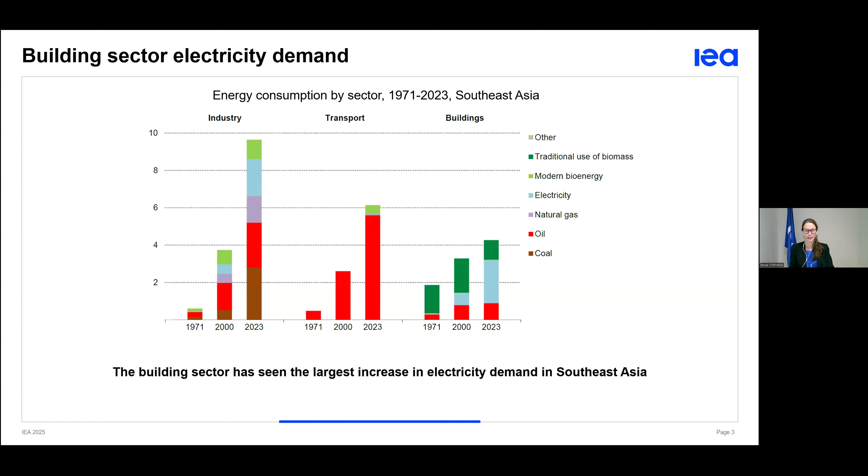So this is just to give a flavour, as we introduce the topic of the building sector in Southeast Asia, to orient ourselves on some of the hot topics. One of the important issues we see in Southeast Asia is the increased penetration rate of air conditioners in households. Appliances and space cooling actually account for more than 30% of the energy consumed in buildings, and their share is set to increase rapidly.

And this trend is actually projected to grow ninefold in the region, from 30 million units in 2020 to 275 million units in 2040. And we do see differing rates of air conditioning ownership in Southeast Asia.

Really being able to collect information on and to clearly understand and quantify energy demand and energy efficiency is critical for us when we're supporting building sector policy. So I wanted to include these introductory pieces of information to set the scene as to why we might be interested in energy demand information for Southeast Asia and how it might inspire and inform our policy making.

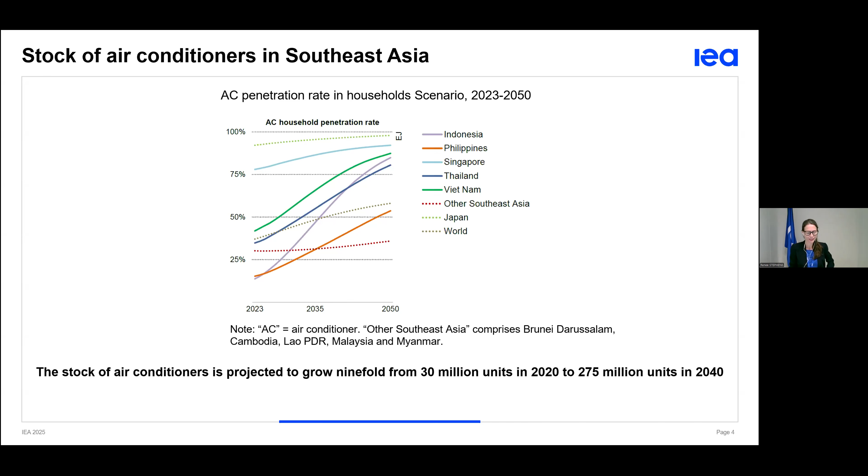So into a definition: what is demand-side data? I'll go through this briefly because some have seen this before, but today we're focusing on what demand-side data represents for the residential and services subsectors in the economy in Southeast Asia.

So demand-side data represents the energy consumption and the activity data for the end-use sectors, and we often see it grouped into end-use sectors according to buildings, industry and transport. Typically energy consumption is given on a per annum basis, and some common units that we'll find in the building sector will be kilowatt hours. We might be talking in terms of joules, potentially when we're talking about gas usage, for example. And activity data is going to vary by category, and it covers a wide range of activities.

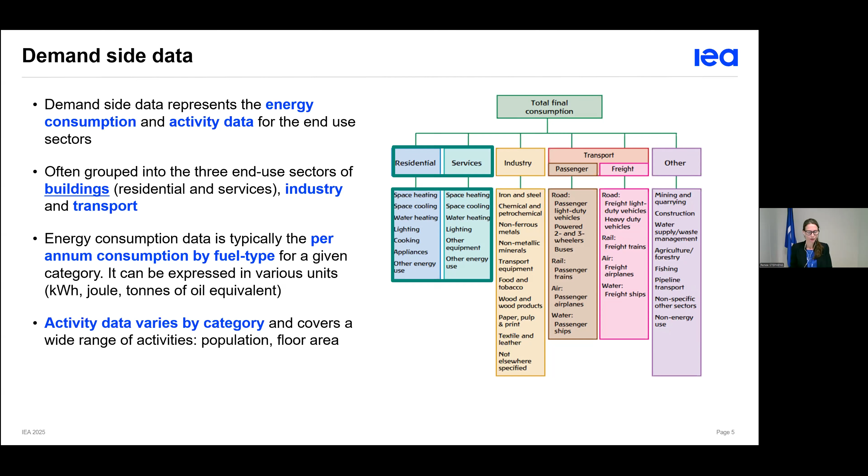So for the building sector, when we're talking about activity data, we might be looking at what is the population that is being served, or what is the floor area that we see happening in terms of the energy consumption. So really, this is where we begin with the definition of demand side data.

And so what are energy efficiency indicators? So the energy efficiency indicator is a ratio representing the energy consumption per unit of activity of the given category. So these are signs that describe observable changes, and they really are the building blocks, the evidence that we use for looking at policy and what we might be doing around energy efficiency and how to improve energy efficiency.

The most generic or general form of an energy efficiency indicator you might hear about and we use is energy intensity. And once we've got an energy efficiency indicator that's in place and we've identified that and we're collecting data on that consistent basis, then we can be using that data to track and compare information and progress over time.

And so in the right-hand side there, this is just a visual diagram that shows that you can have different levels or different hierarchies of looking at energy efficiency and what those indicators might be. So on the bottom, that's a more fine-tuned, oftentimes more accurate picture of specific energy efficiency performance that might be happening, for the building sector, for example, at an appliance level. So what is the energy efficiency of individual types of appliances?

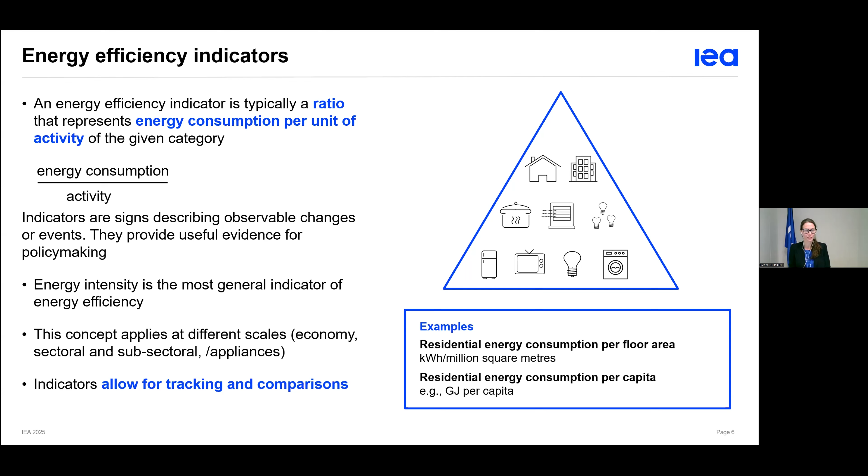And so there's some examples there on the right-hand side of how we might define residential, for example, energy consumption. We might look at that on a per floor area basis and using units like kilowatt hours per million square meters, not kilometers. That would be pretty aggregated, wouldn't it?

And then, so how is all this relevant for supporting our policymaking, or if we're a person who's enabling policymaking, how is this data gathering useful? So demand side data and energy efficiency indicators are really about quantifying energy consumption and energy efficiency. So for the policy development side, this data can be used to identify the current situation, trends, and to highlight problems that need solving or the opportunities for improvement. And they can be used for establishing a baseline of performance and to set targets and objectives. So it's a really important starting place.

And again, this applies at different levels of policy making. The very highest level, whether we might be talking about national plans and roadmaps, right down to the detail of what we're going to do about improving the energy efficiency of an appliance in a residential sector, for example, or a commercial. And then monitoring data is, of course, incredibly useful and important for monitoring.

Demand-side data on its own is very useful for understanding the current situation, trends, and for projecting what might be happening with energy consumption in our countries or regions. And of course, it's a basis for evaluating progress and success of policies that have been implemented. And then also for refining what we might do in the future and recalibrating targets and really assessing how to make further headway.

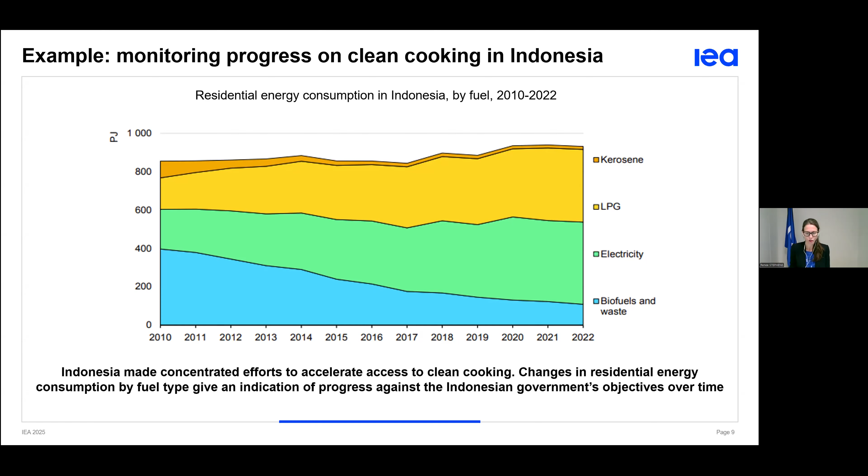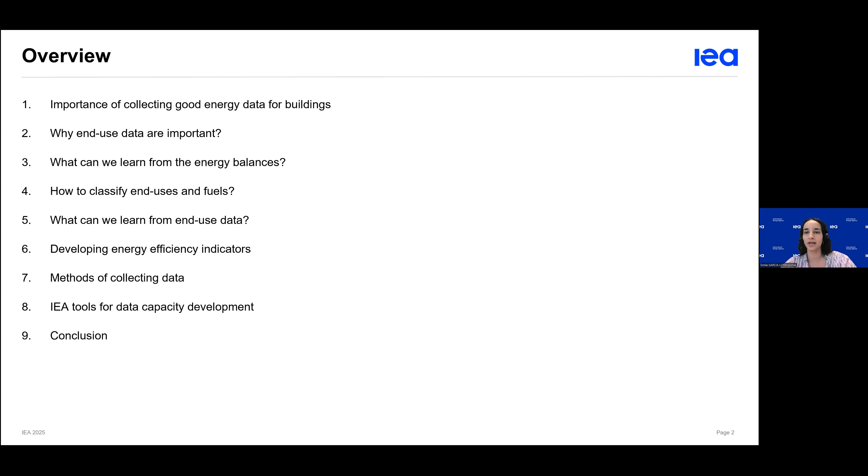Let's start with why the building sector is important. Buildings and appliances determine and shape our quality of life. The building sector is central to people's daily lives, from the heating, hot water, and cooking in our homes, to the lighting at home and work, and the everyday use of appliances like refrigerators, washing machines, televisions, laptops, etc. As demand for cooling and appliances rises, ensuring energy efficient, low emissions buildings is key to improving quality of life, reducing energy poverty, and also achieving climate goals.

When we disaggregate Southeast Asia energy consumption by sector, we can clearly see how energy use has evolved from the 70s to our days. The industry sector remains the largest consumer, accounting for around half of total end-use energy demand.

It consumes nearly 10 exajoules per year, with growth driven by increased production of iron, steel, chemicals, and light manufacturing. Then the transport sector has driven the region's oil demand, reaching around 6 exajoules in 2023.

But the building sector, while more modest in total energy consumption, still plays a critical and growing role. Today, more than 95% of households in the region have access to electricity, and around three-quarters use clean cooking options such as LPG and improved cook stoves. Energy use in the building sectors has been shaped by rising incomes, urbanization, and significant improvements in energy access across Southeast Asia.

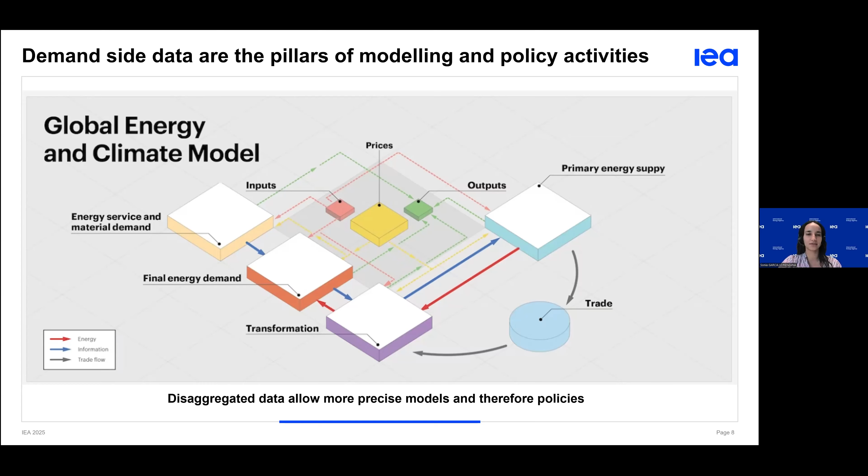And end-use data are the basis to develop efficiency indicators. Generally, energy efficiency indicators are intensities presented as a ratio between the energy consumption measured in energy units and activity data measured in physical units. For example, we can compute indicators such as space heating per floor area, lighting energy consumption per dwelling, or total services energy consumption per value added, which give us important information.

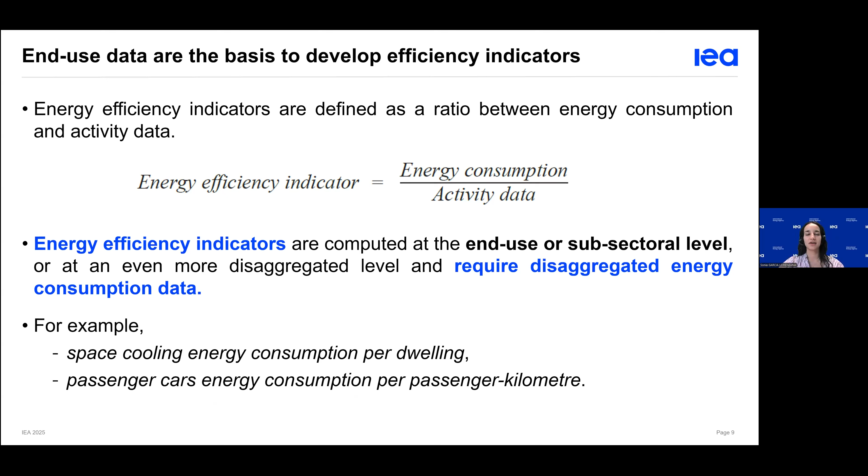These indicators provide valuable insights into energy efficiency, consumption patterns, and sector-specific trends, and their selection depends on the specific type of information we aim to extract, whether it relates to household energy use, service sector efficiency, energy intensity, etc.

Thanks to all this new detailed data, one can, for instance, decompose the consumption trend into three drivers, namely activity, structure, and efficiency. For instance, here for Portugal, we can see that efficiency gains have compensated for increased structure overall, leading to a more or less stable consumption in energy. This is key to track the impact of past policies, for instance.

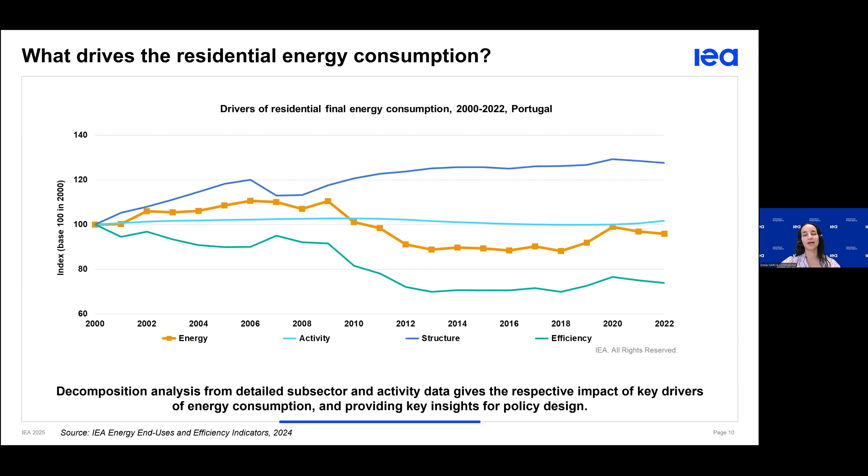One can also learn from efficiency indicators where and how savings are happening, the effectiveness of policies, potential for future improvement, and the importance of continued investment.

Here are the results from this decomposition analysis shown for the whole Portuguese economy over the past two decades. Total final energy consumption in Portugal in 2022 was just above 600 petajoules, with savings equal to 125 petajoules, which is almost 20% of its 2022 energy consumption. It highlights how much energy has been saved only thanks to efficiency improvements.

And here, these gains for Portugal mainly come from residential and also later on industry and services. This clearly shows how targeted improvements in household appliances, building design, and heating systems can deliver long-term benefits.

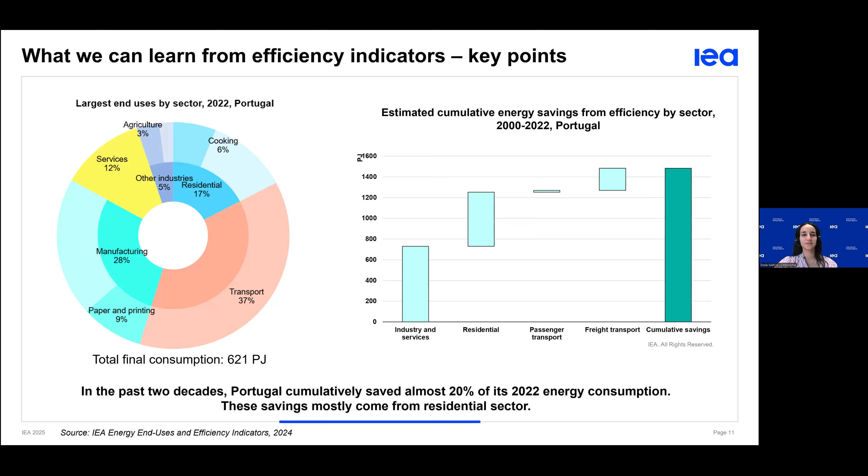But going a step back from end-use data, what can we learn from the energy balances? As you know, a country's overall energy situation data can be presented as an energy balance, which is basically a matrix that displays flows and products and is divided into three sections: supply, transformation, and final consumption.

In the columns, we have the energy products, and in the rows, we have the different flows. In an energy balance, you can compare products since they are all reported in the same unit. So this format allows easy comparison of the contribution each fuel makes to the economy, and also the interrelationships through the conversion of one fuel into another.

Here, we will only focus on the demand side data, which is the second and third floor of the matrix. The third floor represents the total final consumption, where particularly buildings consumption is allocated into the two rows highlighted in blue, which are residential and commercial and public services.

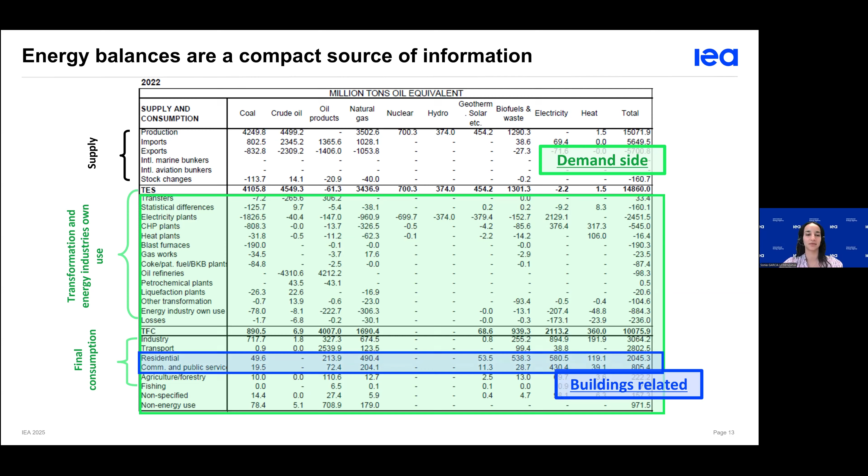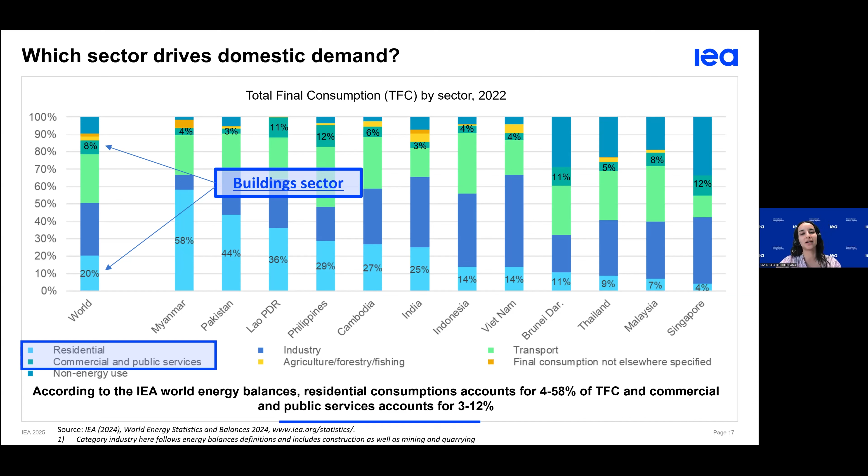And also, we have a category that collects other energy use, which typically refers to energy that cannot be attributed to specific appliances or end uses due to insufficient disaggregation.

Now, the services sector is divided by building energy use, composed by end uses like the residential sector, but here we only take into account space heating, space cooling, lighting, and other energy use, and the non-building energy use, which takes into account energy consumption in the services sector that is not building related, such as street lighting.

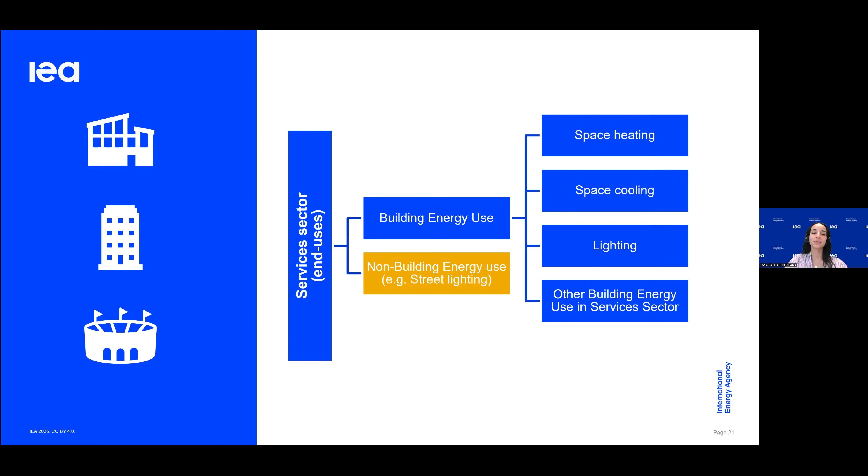But also, the services sector can be divided by subsectors, ranging from sewage and waste collection, wholesale and retail, accommodation and food services, to public administration, education, arts, or other services activities. These codes are divided by the ISIC codes.

In addition, energy use can be collected as total energy consumption, of which data centers is a segment that has grown rapidly in the last few years. Then each of these end uses and subsectors can be further broken down by energy products such as oil, gas, coal, biofuels, heat, and electricity for both residential and services. The real challenge here, however, lies in obtaining disaggregated data, which is not always available or consistently reported.

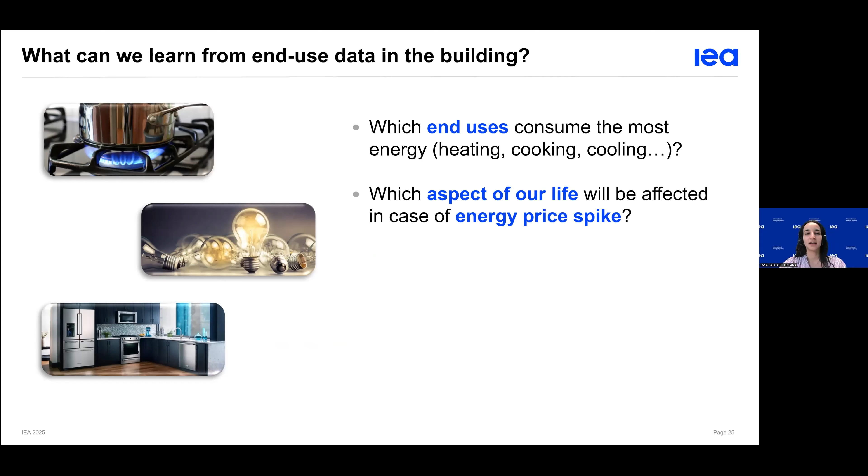And after doing all this aggregation, what can we learn from this end use data? With building end use data, we can answer questions such as which end uses consume the most energy: heating, cooking, cooling, appliances; which aspect of our life will be affected in case of an energy price spike; what is the share of LPG and electricity used for cooking; are we using energy for space heating more efficiently over time; or which end uses are efficient and which ones need help to improve?

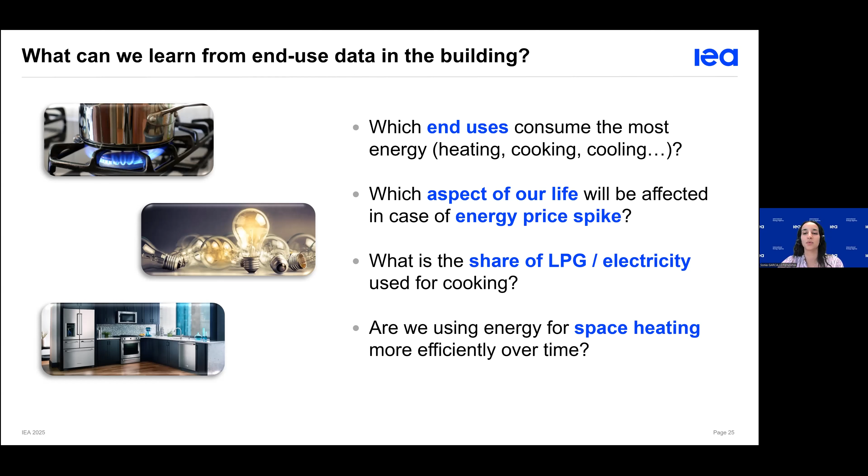When we look at overall results in IEA countries, we see that space heating accounted for over half of the residential energy consumption, with the highest shares in European countries and the lowest in Asia and Oceania. Appliances accounted for nearly 20% of total residential energy consumption, with refrigerator-freezer combinations making up around 28% of that share, followed by clothes dryers and televisions, each contributing approximately 19%.

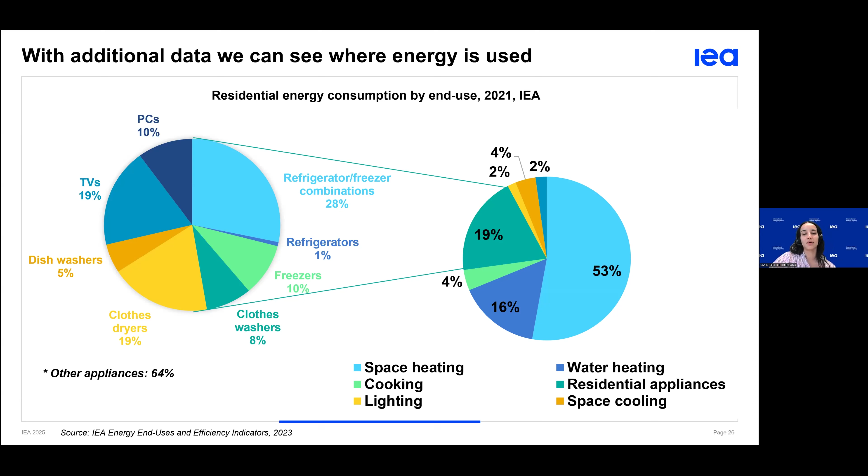We can then analyze country-specific energy consumption to better understand the key end uses in each case. For example, here in the US, we can see it's also relying mostly, like half of it, on space heating, but then also followed by a huge percentage on appliances, water heating, and space cooling.

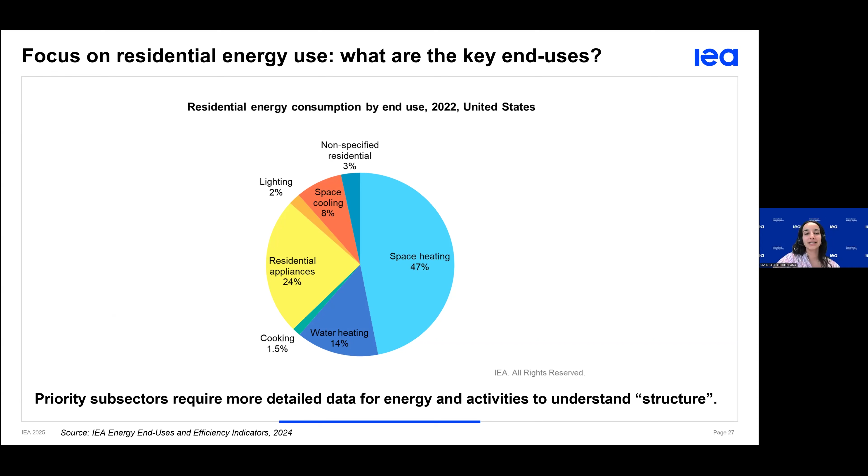This approach also allows us to compare between countries and gives crucial insights into our standard of living. One can see the influence of climate or different lifestyles, such as habits of eating out, cooking methods, and types of stoves. For instance, here we can clearly see a difference between Finland and Morocco's consumption. While the majority of energy consumption in Finland goes to space heating due to its cold climate, only a small proportion is used for heating in Morocco, where most energy is instead consumed for cooking.

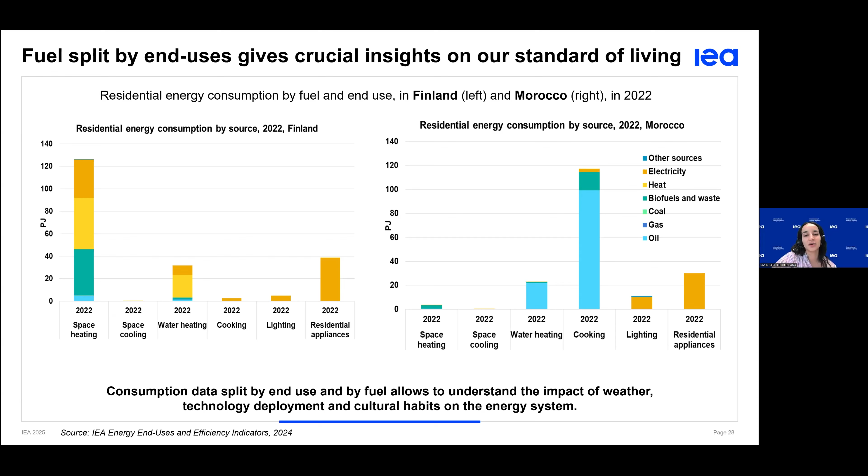Finally, when we talk about cooking consumption within the residential sector, it is important to differentiate between clean cooking and not clean cooking, which is a topic covered under the climate and sustainable development goals. More particularly, SDG 7, which mentions ensuring universal access to affordable, reliable, and modern energy services.

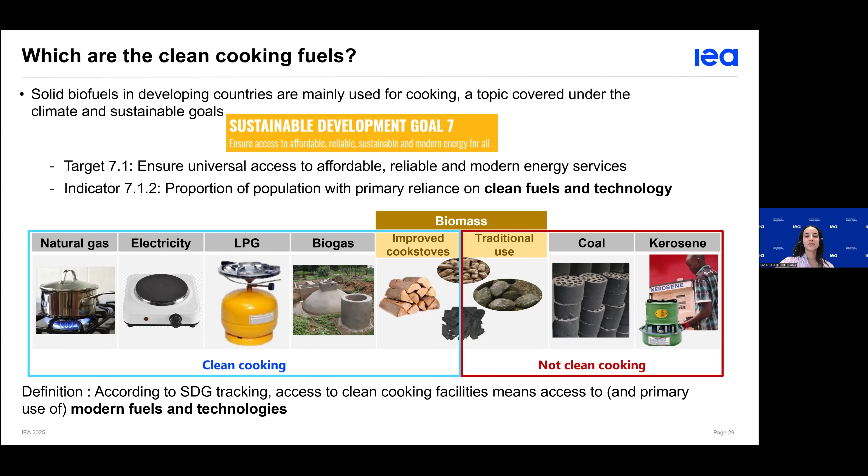How do we define clean cooking facilities? We have several technologies for cooking, and at the IEA we define as not clean cooking technologies the use of biomass, coal, and kerosene. For biomass, only traditional use is not clean; if you use an improved stove, it counts as clean cooking. With this, we can calculate access to clean cooking, and all of this justifies the importance of data for the residential sector.

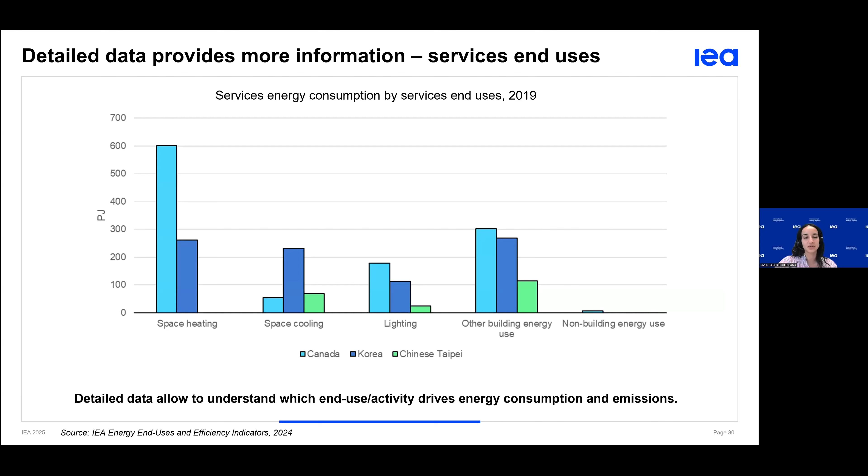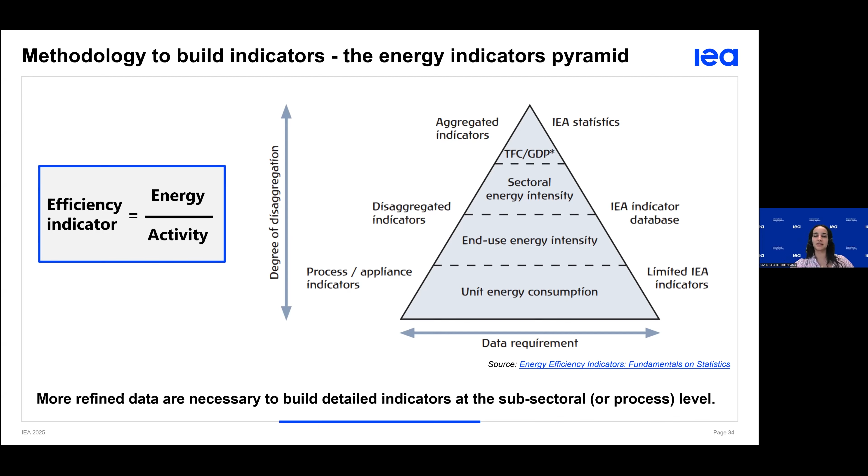The further down one goes, the more data one needs. For example, end-use energy intensity indicators could be space heating energy consumption per floor area, and unit energy consumption indicators can be energy consumption per appliance unit, or per unit of refrigerators, TVs, PCs, etc.

So recall that there are two types of data needed. First, energy data by end use and by fuel, as we just mentioned. Note that heating and cooling need to be temperature corrected to take into account weather effects. We'll see this later on.

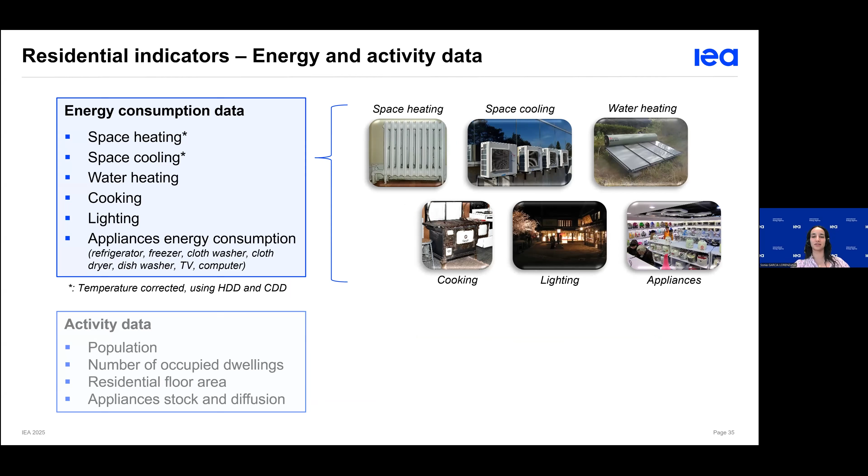But also, activity data is important. In the residential sector, important activity data could be population, number of occupied dwellings, residential floor area, and appliance stock. And importantly, we need to harmonize the methodology.

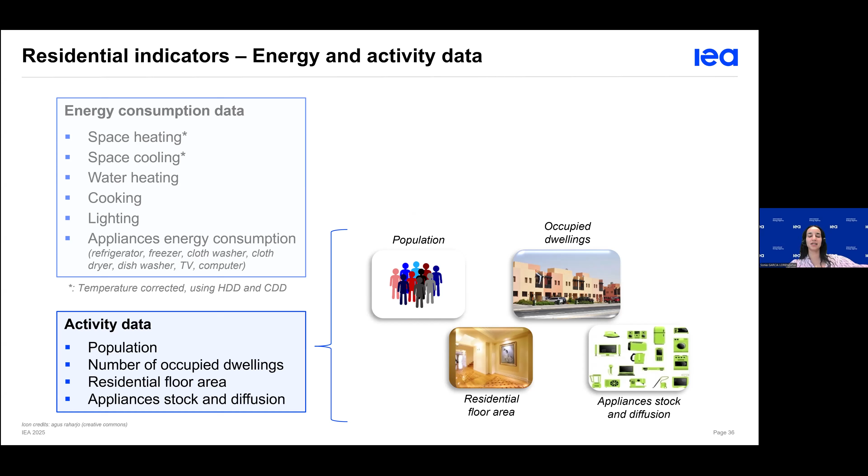Following the same set of rules for energy and activity data is essential to build robust and comparable datasets. For instance, vacant dwellings should not be included alongside occupied dwellings in the energy consumption statistics for the residential sector. This ensures comparability across countries and consistency with population and housing data.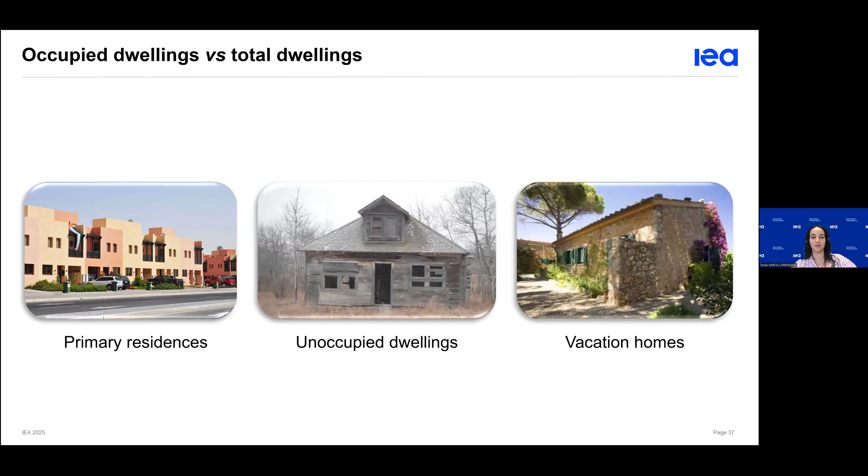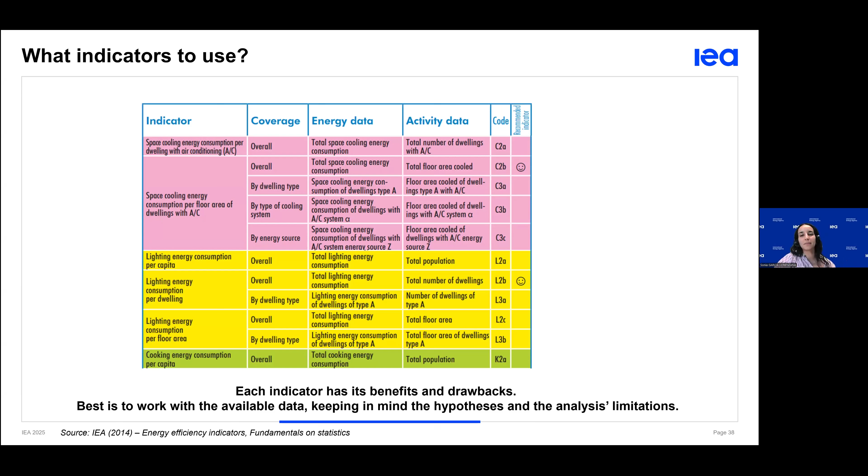With accurate activity data, we compute the indicators. Each indicator has its benefits and drawbacks, and it's important to select the indicator that best suits the information we aim to extract with the available data we have. Efficiency indicators can then help us understand the trends and key drivers of energy consumption.

First, we need some context: the population has increased, so normally more people means more energy use. But surprisingly, energy use per person, or per capita, actually decreased by about 10%, meaning people are using less energy individually than before. At the same time, household occupancy went down, with fewer people per home.

That usually leads to more total homes, which could increase energy use. But again, when we look at energy use per dwelling, we see a decrease of about 15%, even more than the per capita drop, meaning homes are becoming more efficient. Finally, considering only space heating consumption, we see that energy per floor area benefited from even higher efficiency gains over the period, around 25%.

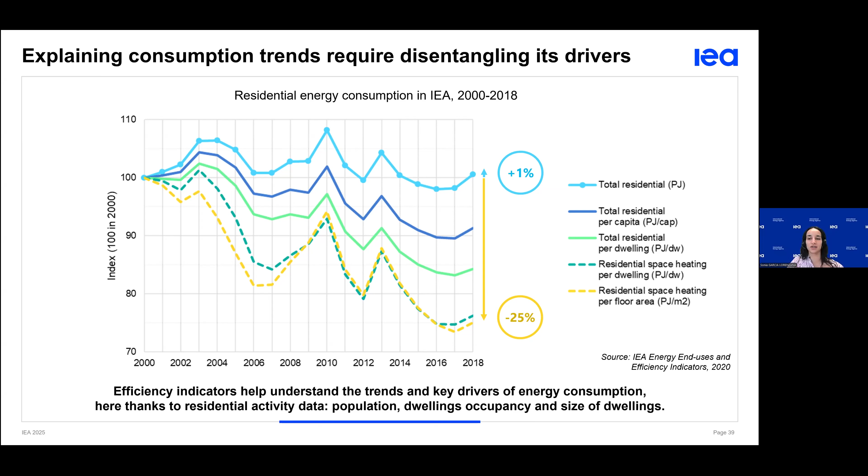So this is a strong sign that efficiency has improved. By isolating these effects and factors, we see that efficiency gains are the key driver behind the stable energy trend. This is the approach for the decomposition analysis.

If we go to Menti, now I would like to ask you: what should be included in the coverage of energy consumption of the residential sector? You can choose between occupied dwellings, occupied plus unoccupied, occupied plus vacation homes, or all three of them.

The correct answer is occupied dwellings, because, as I mentioned before, we don't take into account unoccupied dwellings and vacation homes, to avoid double counting and to make sure we can compare across countries with current population data.

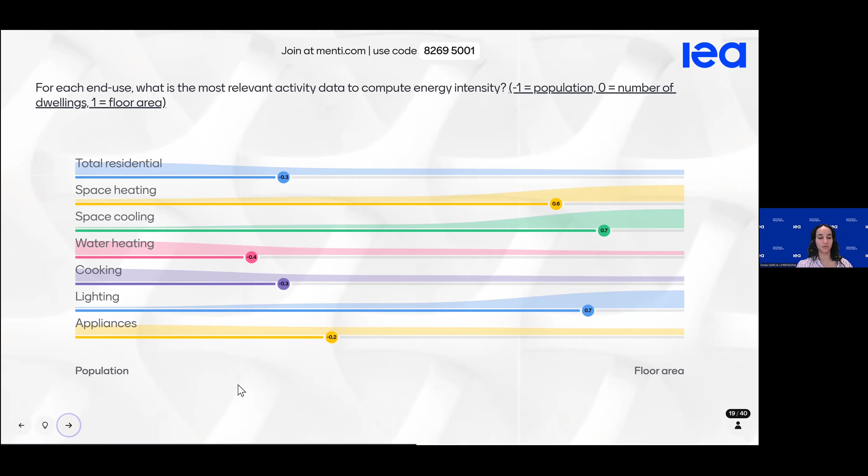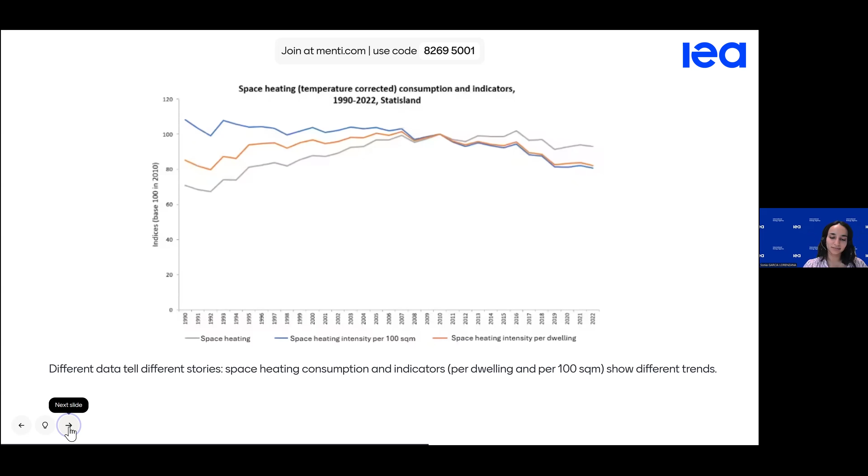Before 2010, we see that space heating consumption is increasing, and increasing faster than the intensity per dwelling, while the intensity per 100 square meters is roughly stable. So how do you understand these trends? Choose the possible ending for the following sentence: space heating energy consumption increased because...

So basically here we are only focused from the beginning of the graph until 2010, and we are trying to look at what was the reason that space heating consumption increased.

Okay, so here we need to look at the indicators and the data that we are looking at. For example, population—most of you have chosen population, but we don't have any information about the population. Here, we cannot tell. Maybe it's true, maybe it's not. So the third option is not correct.

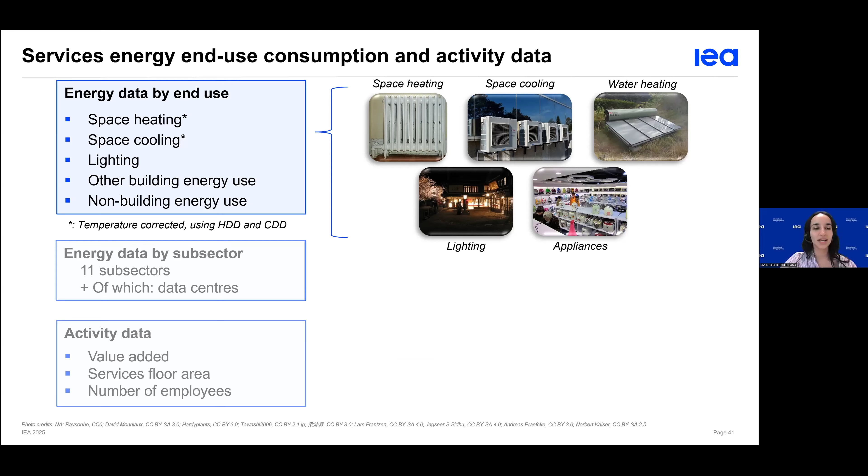Coming back to the slides, I wanted to introduce a bit what we can do with energy efficiency indicators for the residential sector. But then taking into account services, we have the energy data by end use, as for residential, but then we also have energy data by subsector. And also we are now taking data divided by, coming from data centers. The activity data can also be a number of employees, services floor area, and value added.

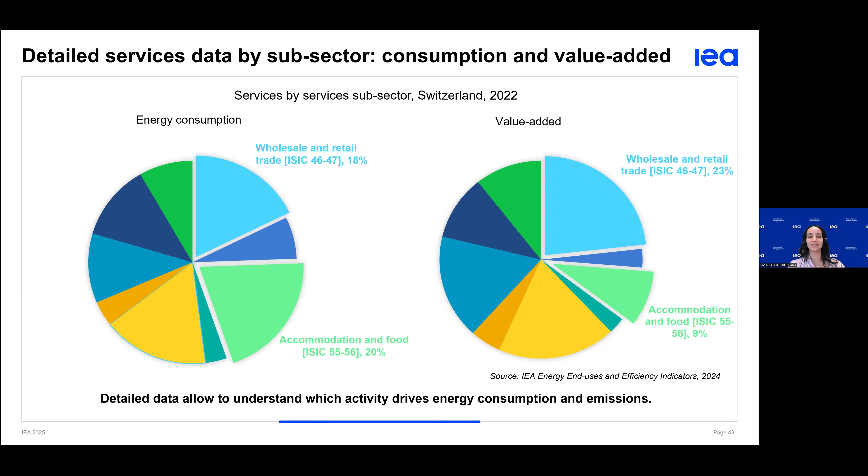The energy efficiency indicators show that wholesale and retail have a significantly lower intensity than accommodation and food services.

Again, if we come back to the Menti, let's try to ask a question similar to the one we did before for residential. For each end use, what is the most relevant activity data to compute energy intensity? Now, instead of number of dwellings, we can choose between population, value added, and floor area.

Yes, here it is similar to residential, but now we are taking into account that we also have subsectors, which usually goes with value added—it always goes with value added. So we have the two last subsectors, wholesale and retail, and accommodation and food, which go with value added. Then total services, which is the most aggregated data we can have for the consumption for services, so it would go with population. And finally, space heating, space cooling, and lighting, which will go with floor area.

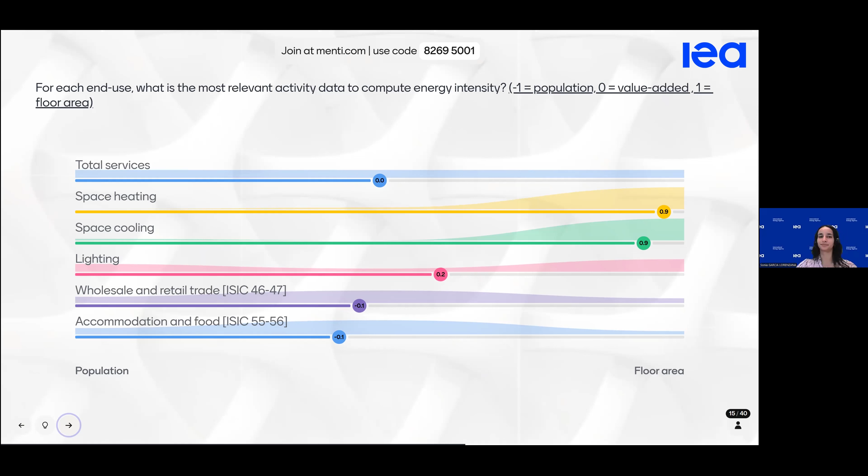So yes, here we have the four different methods, but usually in the building sector, in the residential sector, we rely mostly on surveys. Surveys are costly but very effective and constitute a key method for the building sector. One of the most time-consuming tasks is carefully designing the survey or determining whether a suitable design already exists and identifying a representative sample. Here are the most important parameters to design in case we need to implement a survey:

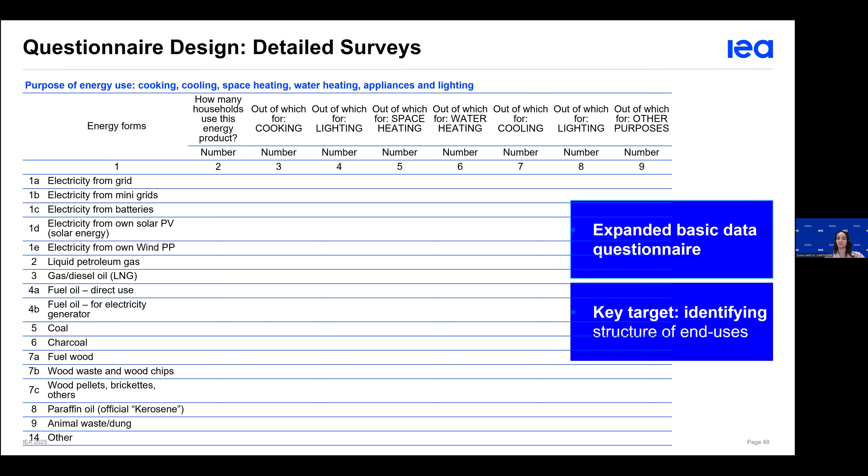After finalizing the survey design and collecting the results, the final step is model implementation. This includes integrating various data sources, the administrative, the macroeconomic, household, and business survey data. These inputs are used to model energy consumption across end uses such as space heating, water heating, and so on.

And the output is the total final energy consumption disaggregated by types of fuel, such as coal, fuel oil, natural gas, etc. Once the data processing models are in place, an annual model is established to calibrate data between survey years and probably fill the missing data.

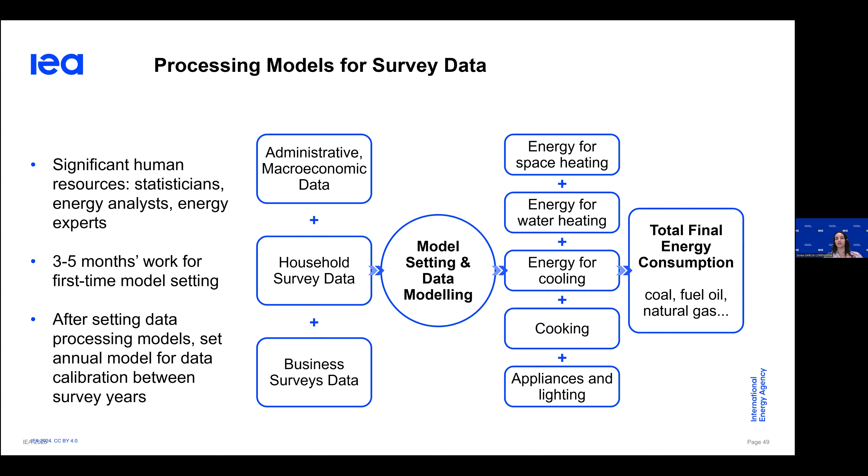So yes, coming back again to Menti. We want to ask you some three questions about your experience and your current data. So do you have a national survey on household energy consumption disaggregated by end use? Okay. Do you have available activity data in your country for the building sector? And select all the activity data that apply.

We cannot. So, it doesn't work, Sonia? It doesn't work? Yes. The choices cannot be pushed. No? Okay. But are you seeing the question in your computer or in your phone? Yeah. The phone. But even though we are pressing it, it doesn't work. Okay. No worries. We'll go to the next one.

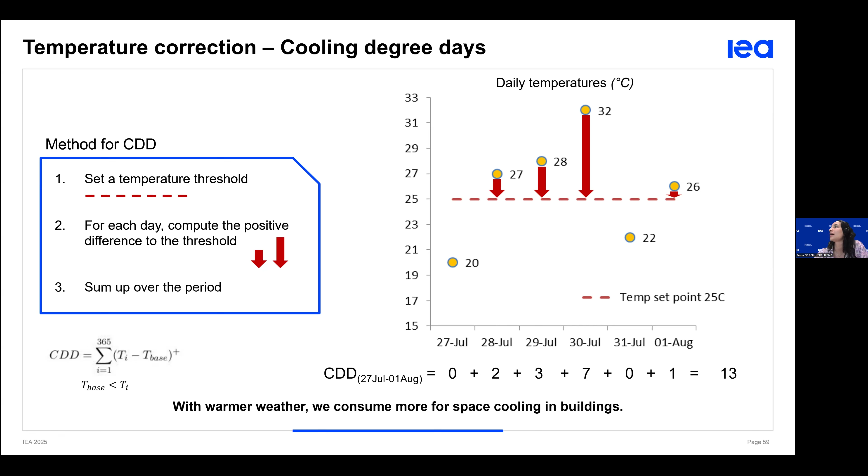And then when we have this information, we calculate the adjusted energy consumption as the actual energy consumption times the average CDD divided by the CDD of the current year. So for example, here we have 2017 to 2019. As before, we calculate the CDDs for each year with the method I just mentioned, and then we calculate the average of the 3 years for CDD. So in the numerator we have that average, and in the denominator the CDD for each year, and then the actual energy consumption.

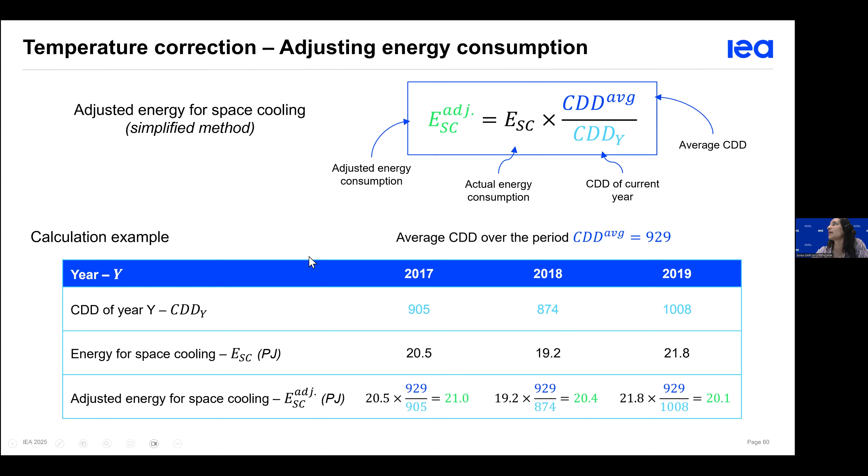So to compute the adjusted energy consumption, we just calculate this formula, and we get, for instance, for 2017, 21. For 2018, 20.4, and then 20.1. So this is an interesting thing to do, because as we can see, the space cooling in gray, which is the space cooling energy consumption without temperature correction, in 2017 is higher than in 2018, and then it goes up again. But with the temperature corrected, it decreases over time. So temperature correction allows us to identify trends more clearly, removing the weather impact on consumption.

And so I have two more questions on Menti, but I don't know if we have time, Agnieszka. Yes, okay, so we don't have time, but basically I just want to finalize by saying that it's good to correct for weather, because then, for instance, we can see that the space cooling with the temperature corrected is actually higher in 2017, whereas here we could think that in 2019 the space cooling would be higher in the last year. And yes, thank you so much.

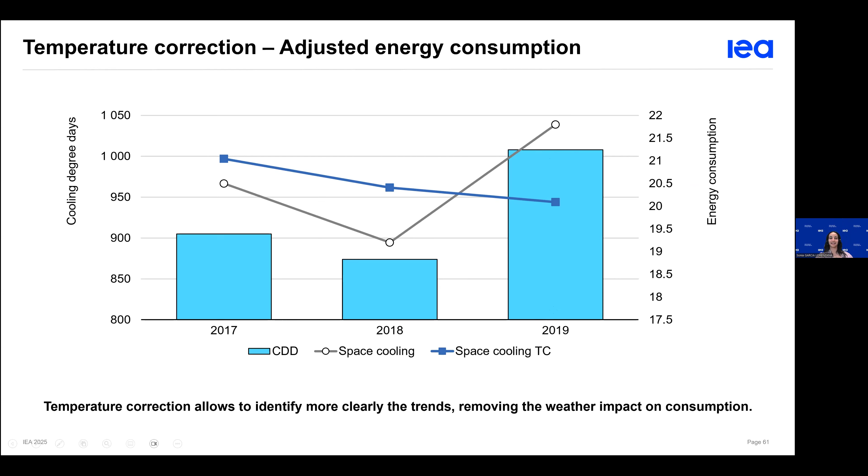The person asked about clean cooking practices from around the world. So I would just quickly reply that this topic is very dear to the International Energy Agency. For example, last year we hosted the Clean Cooking Summit, where we gathered many representatives from around the world. So we are trying to address this issue through this type of fora. And yes, there are a lot of resources and information available on our website about this.

But yeah, that's it. From our side, we are here really more to talk about the measures than implementing policies or projects. But if you would like to follow up on this topic, please contact us, and we will provide more details. Thank you.

And now it's time for the presentation from APEC. Ms. Elvira Gerlidon will give the presentation about the demand-side data and efficiency indicators in APEC. The floor is yours, Elvira. Thank you, Ms. Agnieszka. I'm sharing my presentation. Hopefully you can see it now.

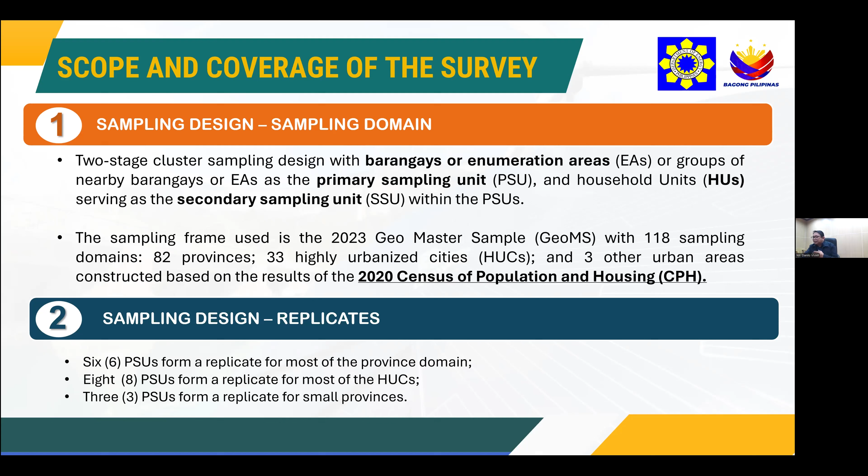Then 3 PSUs form a replicate for small provinces. In provinces with smaller populations, fewer PSUs are enough to provide statistically valid results without oversampling.

For our sampling allocation, to generate reliable estimates at different geographic levels, a specific number of sample replicates is required per sampling domain. For national level estimates, at least 1 sample replicate per domain is sufficient. For regional level estimates, 4 replicates are needed, which is why for 2023 HECS, 4 replicates were employed. This allocation allows flexibility and precision in reporting at multiple levels.

For our sample selection, PSUs are systematically selected from the master sample frame using equal probability. At the second stage, household units were drawn systematically within each selected PSU or barangay. This two-stage probability-based sampling approach ensures that every household had an equal chance of selection, contributing to the survey's representativeness and reliability.

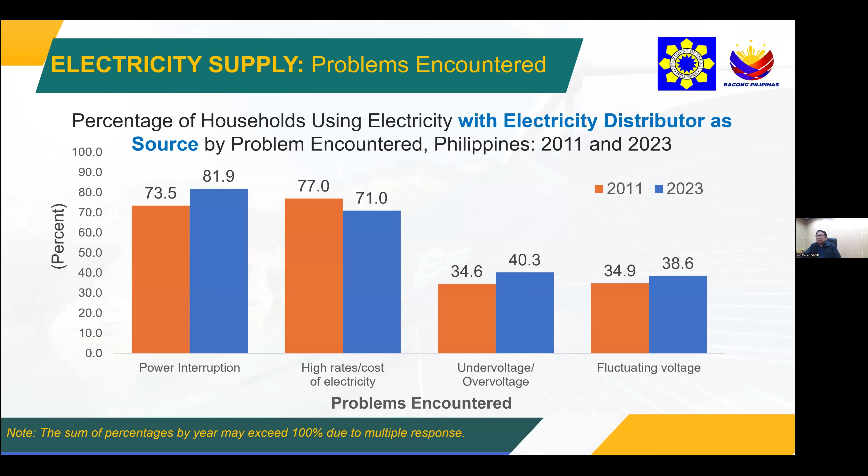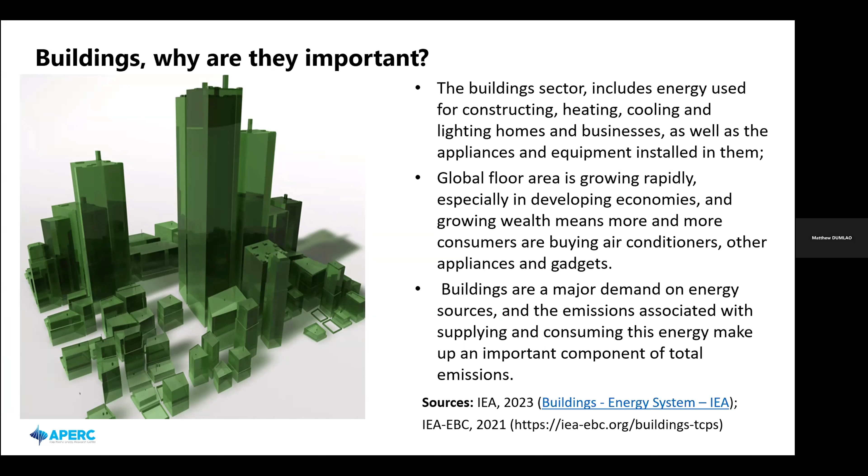And also, why is it not showing? Can you see this? Can you see this? This is what there is.

Yeah, so slow. Although these building sectors, as you already know, include services and households, they have different activity types. In services, there is a complex analysis because of its different activities, like hospitals differ from restaurants. There is an important relationship between the two in terms of end uses like space heating, space cooling, water heating, cooking, and others. But of course, the activity levels are all different in both sectors.

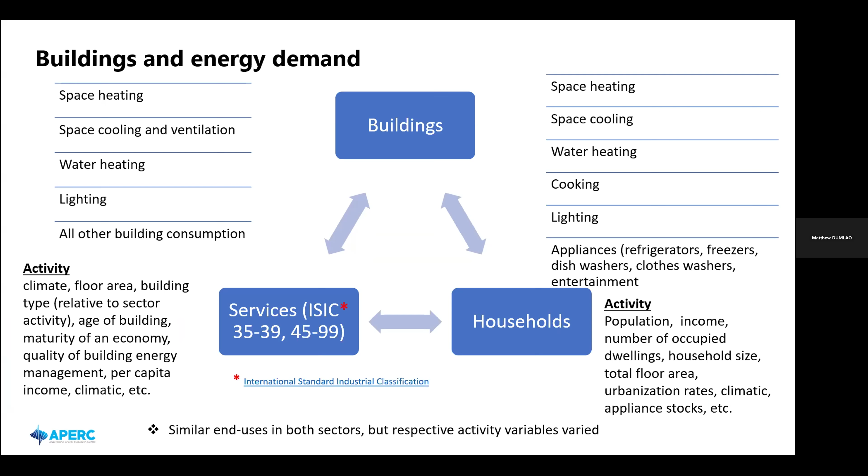Now, let me show you some energy consumption trends in the building sector in APEC. You'll see that although Southeast Asia's building consumption accounts for only a small share of the total APEC building consumption, around 5%, in terms of growth it's one of the top three regions contributing, with the US number one, other Americas (including Chile, Peru, and Mexico) second, and Southeast Asia third with around a 2.3% increase from last year's building consumption.

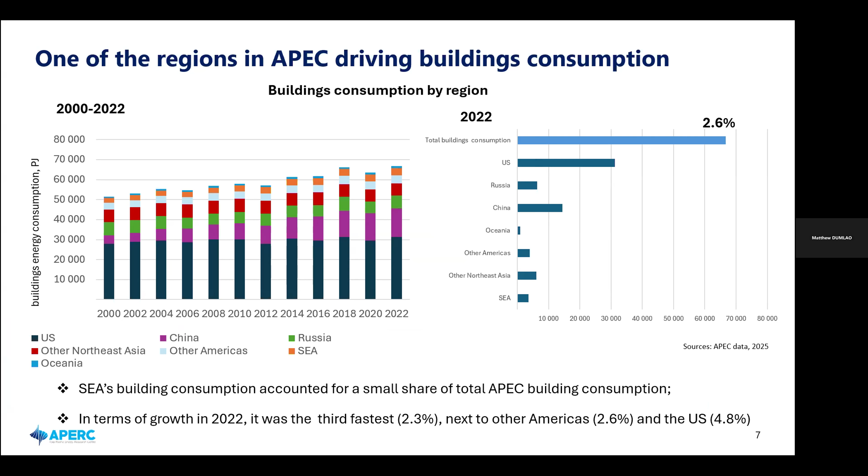To continue, you will see in this slide that the share of building consumption is the third largest in APEC as well as in Southeast Asia. I think it's not just in APEC, but globally it's the third largest consumption, and it's relatively the same as APEC, accounting for a third of total final consumption. But then...

In terms of share between the two, the residential sector accounts for the largest share, with more than 50% of total building consumption, and it's also growing faster than the services sector.

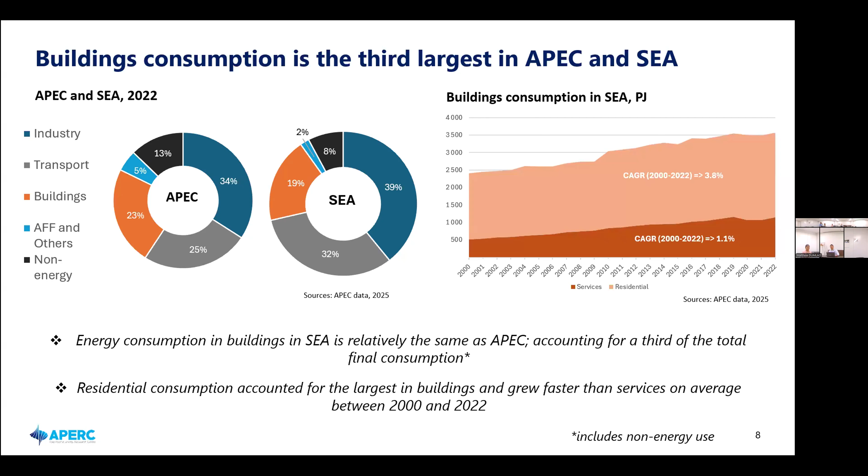And as you already know from the last presentation and yesterday's presentation, the energy balance table includes the services sector and the residential sector. Although in the energy balance table you cannot see anything on end-user consumption, you will see all the types of fuel used for this activity.

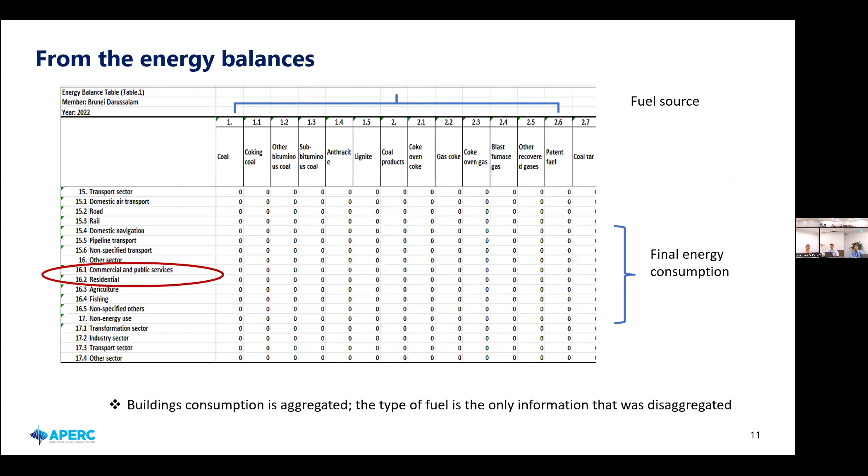Only the aggregated or the type of fuel can be seen in the energy balance sector and energy balance table. That's why we have this energy efficiency indicators template, which, as you have heard already, we had very good coordination and collaboration with IEA, and they allowed us to use this energy efficiency indicator template.

You will see from here, the left side of your screen is the services sector template, and the other one is the household sector. You'll see that they have almost similar activity and uses, but if you scroll down, I won't show the IEA template this time because of the time constraints.

The collected data can only be filled in with aggregated numbers, especially on the services sector. But if the economy has this type of survey, like the Philippines, they could probably fill in all the end user activities in the household sector.

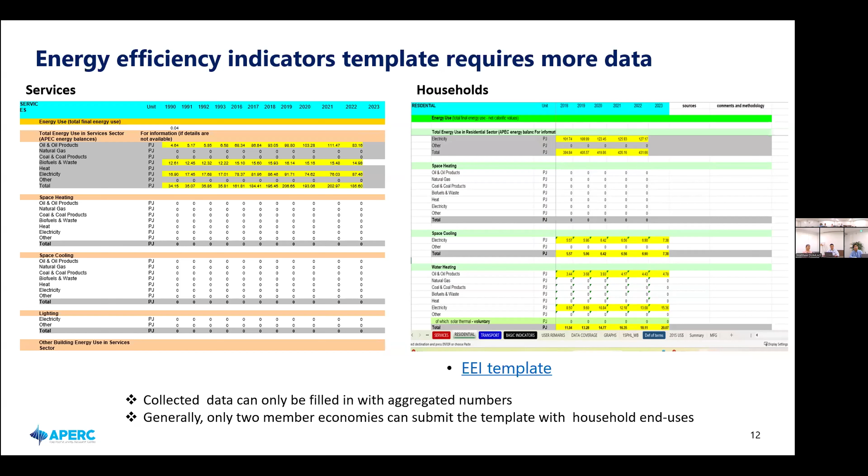So in summary, in APEC, only 2 economies can submit the complete activity or end users consumption. These are Hong Kong, China, and Chinese Taipei. The Philippines, although they have the survey, still haven't completed the household consumption survey or the energy efficiency indicator templates with the results of the household consumption survey. It would be appreciated if they can fill in the template.

But then again, we have this project where we ask or seek help from our consultant on analyzing the gap of this consumption in the household, and we were able to develop a methodology to estimate the end users, especially if we have a basis for that.

So we try to estimate Brunei Darussalam, Malaysia, the Philippines, and Thailand. We already asked their permission or their thoughts on the methodology, and we would probably like to help other economies in this activity.

So what can we see? You already saw some important analysis of the consumption in the building sector, especially if you have completed data. So in this case, Hong Kong, China are able to fill in the energy efficiency template, and it can be seen aside from all other consumption.

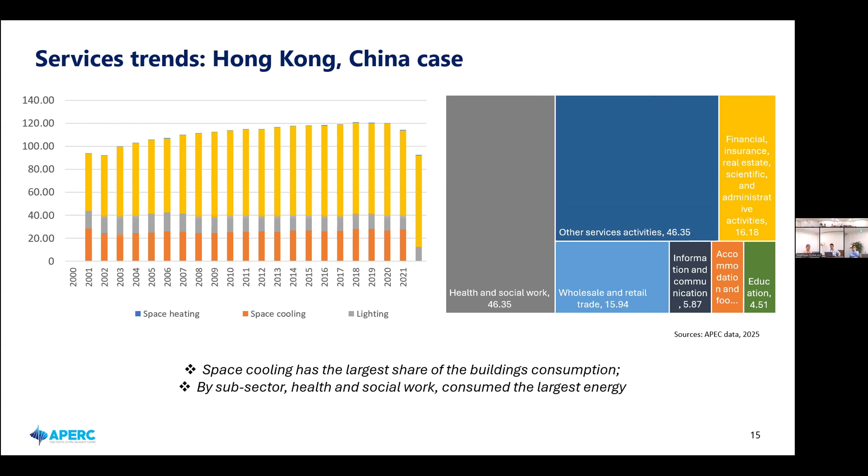For the case of Hong Kong, China, we also see that aside from, because I think all other end users data is difficult to obtain, so this data falls into this category. But then if you take out these other consumption figures, you will see that space cooling is also the largest share of the services energy consumption.

Now, as we also know there's a gap in the Philippines, we are able to estimate some of its consumption based on our methodology. As you have heard earlier, if other activities such as cooking per dwelling, space cooling, and all other activities in the household are now reducing, most probably because of the large increase in cooling, this will affect the total consumption in the household sector.

So this consumption increased by around 2.3% for the last 10 years, and this increase is greatly influenced by space cooling. But then again, because of the reduction in other activities, this was offset by that reduction.

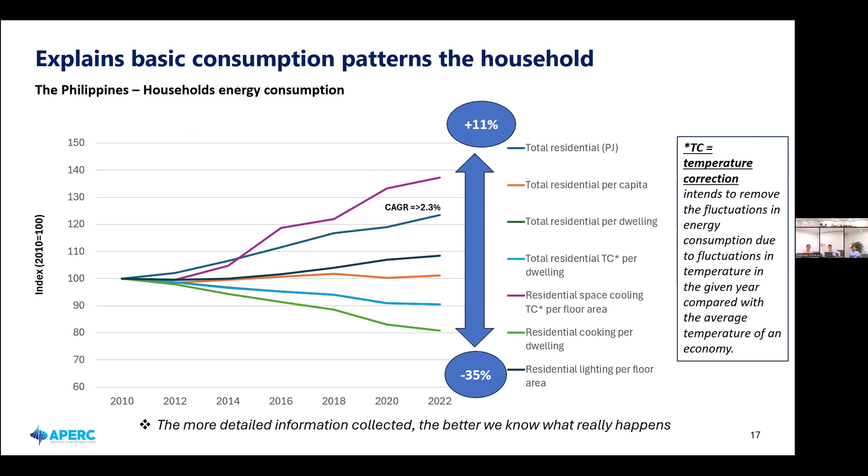So in conclusion, of course, if we have better data, we could give you better analysis. If we have detailed information, aggregated end users, disaggregated end users, and activity data. Because good granularity of data can show which end users activity was highly demanded, and hence we can appropriately recommend some policies. It helps in developing policies and energy transition, especially nowadays that we are racing into the energy transition in the future because of the COP21 goal.

Member economies need to explore other experiences in data collection, as mentioned already by our colleagues from IEA. We can learn from their experiences because other members will probably be willing to share their experiences, and APEC is also willing. You've heard IEA would like to help you out in this effort. Of course, APERC, we are one in our objective to help out other members to collect this end users data or data collection.

Conducting a survey, as already mentioned, is most probably the best way to obtain end users consumption data. Estimation based on technical studies can also be helpful, but it does not really show the true patterns if we do not have any basis at all.